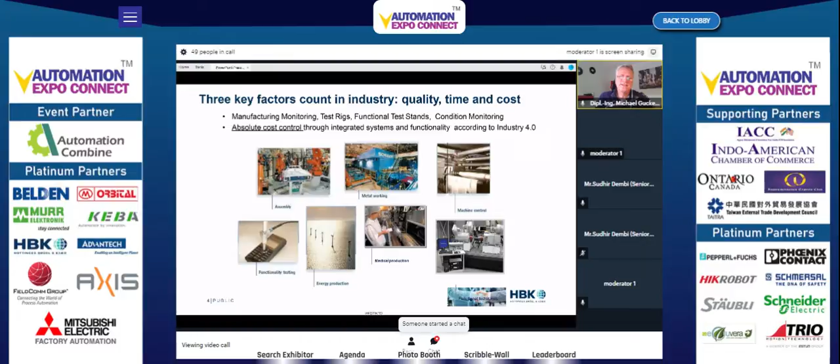So this is actually where we are in: a lot of machine monitoring, assembly lines, wind energy, and functional testing. Everywhere we have to use sensors to get feedback from the production and also to optimize our production, to make it faster and more efficient, so we can save money. Next slide, please.

And now we will jump a little bit deeper into how that affects our daily life in our production lines. Next slide, please.

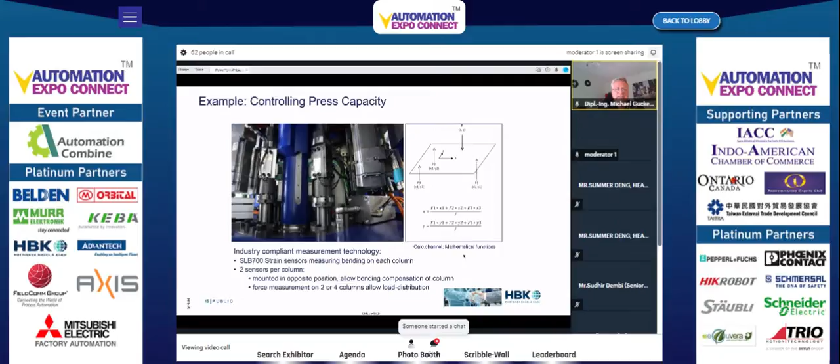So you see, it's not only waiting until there is damage. We can also do service or maintenance as a predictive task—seeing that something is getting from green to yellow, we have to make a service before it gets red and we have to stop the machine. And this is only one example. You can imagine this is very helpful for a lot of production machines. Next slide, please.

This is just to make you aware of how these calculated channels or smart functions work. There are blocks on the right side, where from the left side you put in your input signals. In the middle, you have some parameters for calculation. On the right side, you have your outcome, like summing, or in this case, a PID regulator. You don't have to write any line of code—you just click input, calculation, output, and then you can start with your tests or with your production.

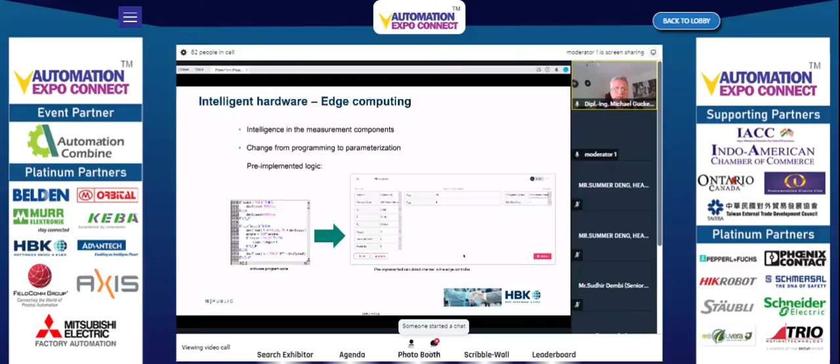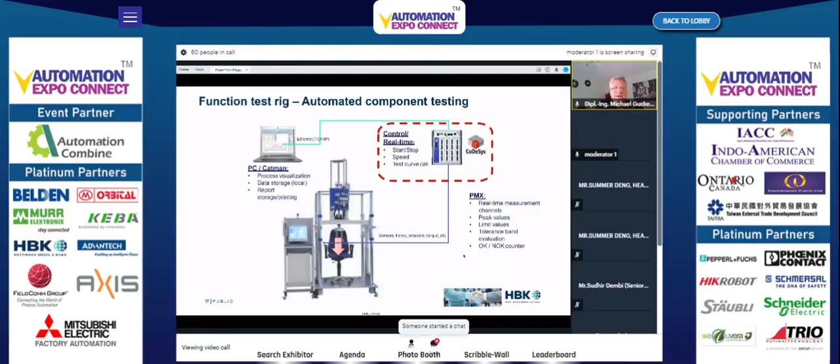This is also to save money, and so that people who are not educated as software programmers can use these smart amplifiers. It makes it very easy. Next slide, please. This is another example with a multi-channel amplifier doing a test for seats or something else. So we can jump to the next slide, please. This is an example about the interfaces we use.

There is no special software which has to be loaded on a PC or somewhere else. The operation comes directly from the device, meaning there is a web server inside. You only need a standard Ethernet, which you have on your PC, on your production line, or even with Wi-Fi. This makes it possible to get direct access to this unit, and you can then adjust all parameters. You also see diagnostic information, and you can use it on each device which has a web browser—either a PC, a tablet, or even a smartphone.

These web servers are optimized so that you always have a good reading and can see all the values on the screen. This makes it very easy, and because it's an Ethernet-based construction, you can do that not only directly at the device—you can use a factory network or even the internet to make a remote control, and you can directly see what your machine, your production line, is doing, where the errors are, what is green and what is red. This reduces your time and money, because you don't have to drive or fly to your end customer somewhere around the world. You can do it from your home base. Next slide, please.

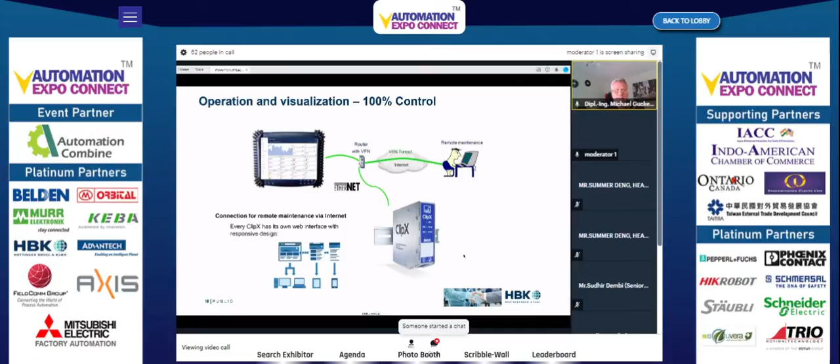I have an example here. We have one unit located in Germany, which is connected to the internet. If you click on this demo, later on after my presentation, you can have direct access and see how things are working.

Please be aware that only 2 connections are allowed. So if you can't connect, other people are already in.

Next slide, please. This is an overview about the web server. We have 3 different entry levels for simple operator, but also for service people and admin, because not everybody could be allowed to change settings, of course. We have values reading, information about scaling, the TEDS, and so on. Let's see if we have a chance to do a little live demo after the presentation.

Next slide, please. As the amplifiers or smart amplifiers have only one input signal, we have also integrated a ClipX bus where we can connect several units in case you want to read more signals, like we have seen in the press application, where we have multiple inputs and we have to calculate an average force or an average load if it's a weighing application. This can be done over this internal data bus, where we send values, but also the status, from one ClipX to another, and this one can then do the calculation.

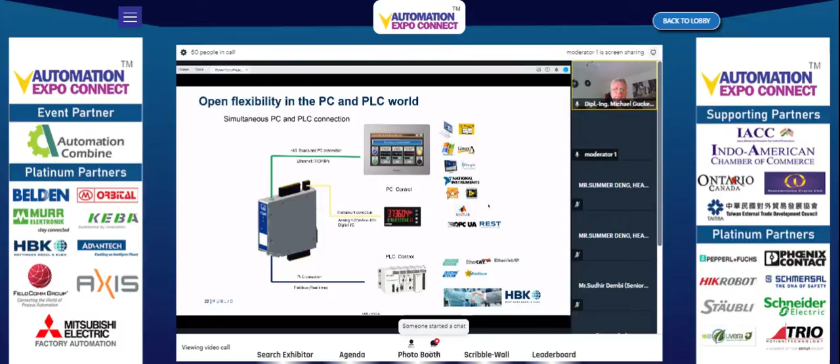I think as a machine builder, you are involved in field bus applications, and I now want to switch a little bit to the next developments which come up. This is where the jump happens from field buses to edge software or to cloud software.

Beside the real-time data which we use in a PLC to control the production line in terms of milliseconds, we also use data which we get out of these measuring chains for predictive service, or for a recording about our yield, our outcome. And then we have new technologies, and I will show you that. Next slide, please.

Meet EcoStruxure Automation Expert, a new category of software-centric automation for the digital world. Today, automation engineers use many tools to design an industrial automation system. Without a common source of data, they must manually repeat tasks from tool to tool and discipline to discipline. It's not efficient. EcoStruxure Automation Expert creates a complete digital lifecycle for your automation system.

Engineers are free to design processes independently of the automation system. Once the design is complete, the engineer deploys the application on the hardware in just a few clicks. Applications are automatically distributed. Any changes can be made with zero automation engineering.

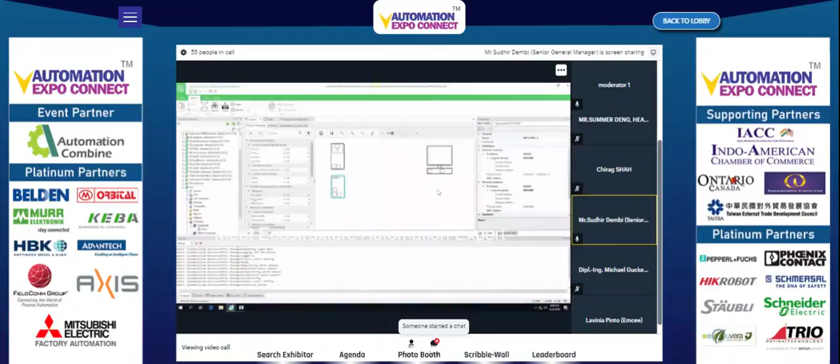EcoStruxure Automation Expert makes it easy to design your automation control system, and you can easily connect a digital representation of an asset to its real-time control. Using this digital twin, testing and adjustments can be conducted in a virtual environment. Commissioning time is reduced. You're up and running faster.

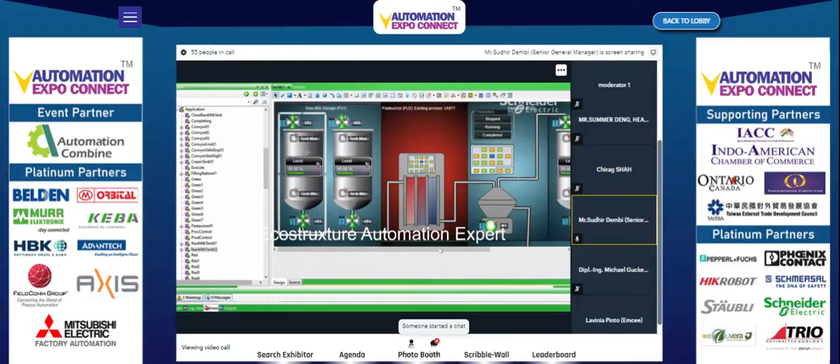Market demands change fast and often. To keep up, manufacturers must be agile, adding and modifying equipment quickly and easily. When market demands drive your plant to its limits, EcoStruxure Automation Expert makes it easy to generate additional capacity. Production assets can be added with a simple drag and drop. EcoStruxure Automation Expert is a new category of software-centric automation.

Bring your operations into the future today. EcoStruxure Automation Expert can help you keep up with the speed of doing business in the digital world.

So overall what we are driving here is total efficiency of your systems. What we want to bring to the table is interoperability and portability. We want to drive 100% engineering efficiency here, where you can port it to your systems from P&ID diagrams, get it inside, get the electrical pieces also involved in it, whatever you need for your operations, operational effectiveness, and the future readiness. The way we say about the future readiness is this is an evergreen platform now.

We are using the latest technologies out there where I can port the application codes from one to another. Today, even if the code is being deployed for the next generation software, whatever releases are coming up, I can port the codes out there, or the functionalities can be ported in the lower version of the software as well. What's going to come up is just enabling the composite objects, what we were bringing into the table, which are basically codes that can be interoperable and portable out here.